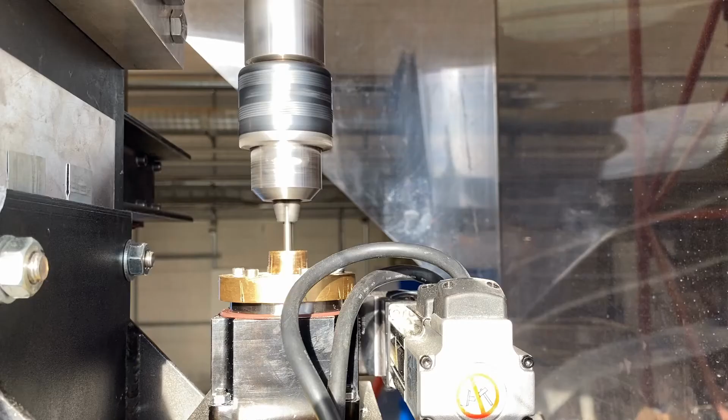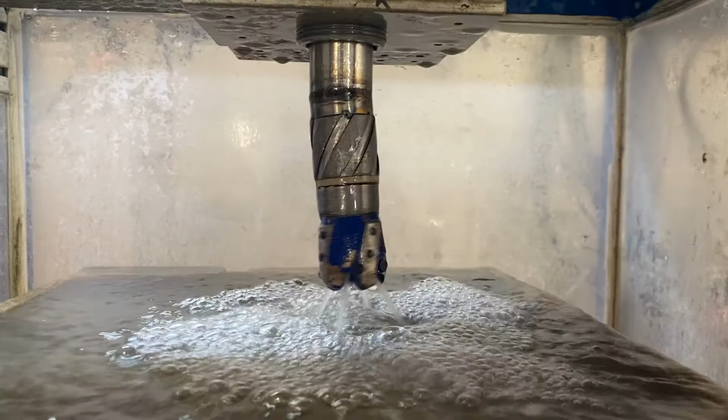The rig operates 3 motors. One motor is used to hoist the drilling component up and down on a ball screw, applying weight on bit. The next motor enables azimuth change. The last motor provides bit rotation by means of a long, thin rod.

The rod is connected in the top drive motor and in the BHA. It rotates inside the azimuth system, hydraulic swivel, and inside the drill pipe.

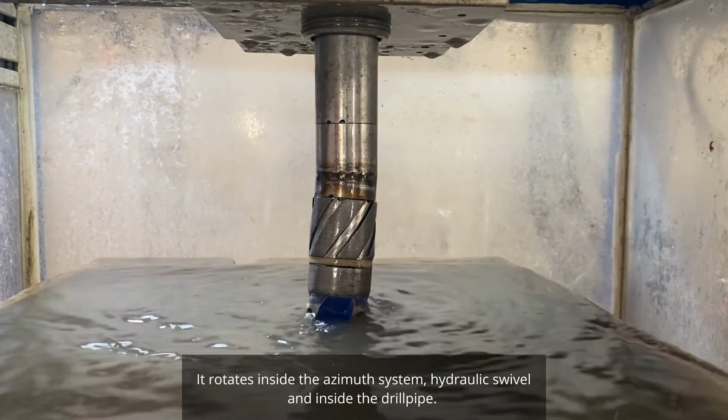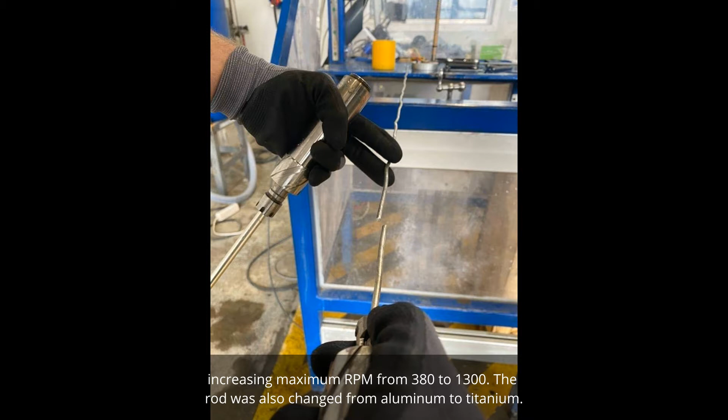The most challenging aspect was the rod twisting off while drilling. The solution was to change the top drive motor, increasing maximum RPM from 380 to 1300. The rod was also changed from aluminum to titanium. The lessons learned from this was that low RPM with high weight on bit generated torsion, which twisted the rod.

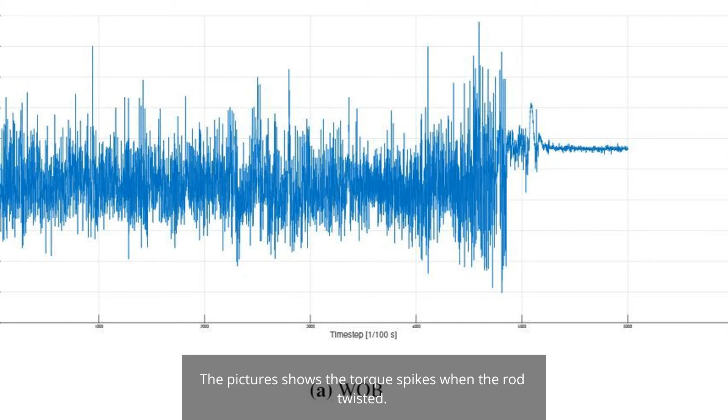The pictures show the torque spikes when the rod twisted. The team also learned that through trial and error, aluminum rod proved too weak. Steel, which allowed for less bending, was better, but still twisted. Finally, the team chose titanium, which was the best fit with respect to shear strength.

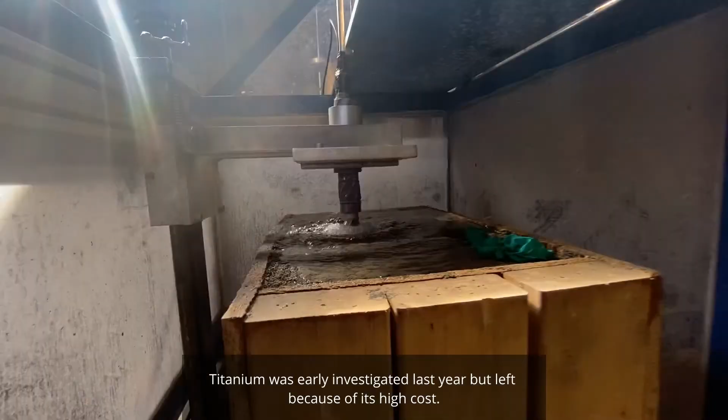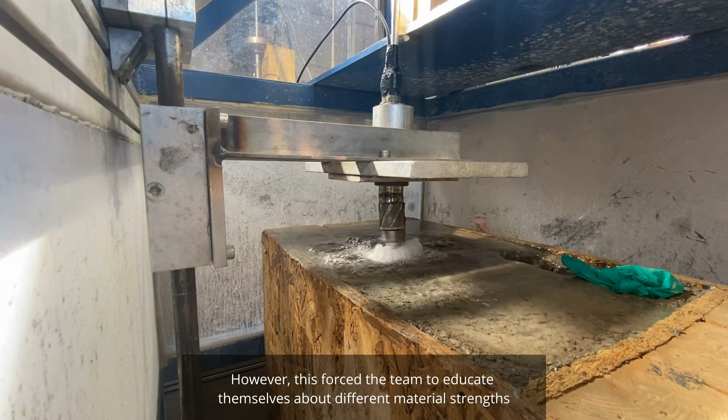Titanium was early investigated last year, but left because of its high cost. In retrospect, the team should have invested in the costly titanium rod. However, this forced the team to educate themselves about different material strengths and the forces present during drilling operations, such as rotational and axial forces.

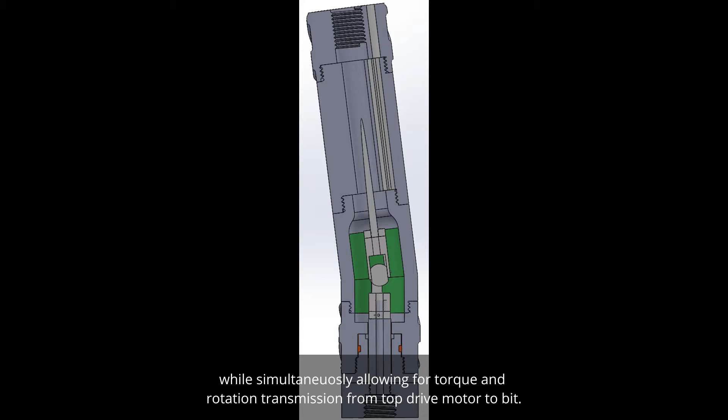The BHA is designed to build an appropriate angle with respect to the 30-degree inclination requirement. It is also designed to house and protect the downhole sensor card properly, while simultaneously allowing for torque and rotation transmission from top drive motor to bit.

As shown in the picture, the BHA is made up of 2 stabilizers: a sensor housing, a bend sub, a universal joint, a drive shaft, a packer, and a bit sub. The stabilizers stabilize the BHA in the borehole to reduce vibrations and offsets.

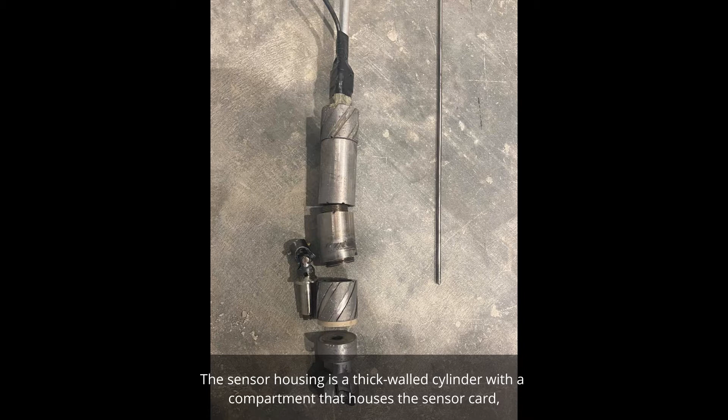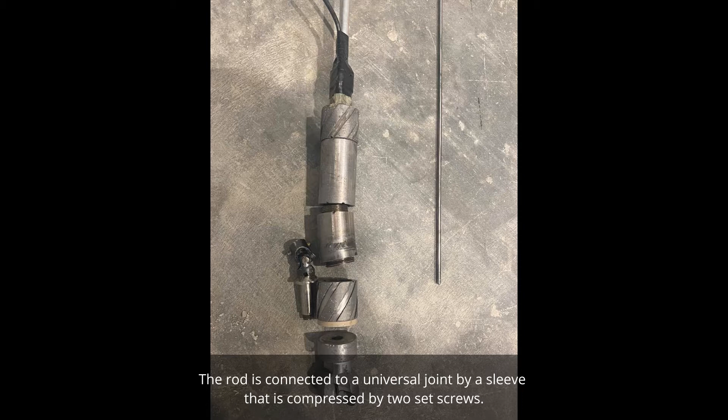The sensor housing is a thick-walled cylinder with a compartment that houses the sensor card, sealed off with liquid rubber and epoxy glue. The rod is connected to a universal joint by a sleeve that is compressed by 2 set screws. The universal joint is welded on the drive shaft that runs through the lower stabilizer and into the bit sub.

The packer located inside the near bit stabilizer is made of PEEK, allowing for concentric rotation of the bit sub and bit regardless of the packer and near bit stabilizer. It also has 2 toroidal seals to guide the water through the drive shaft.

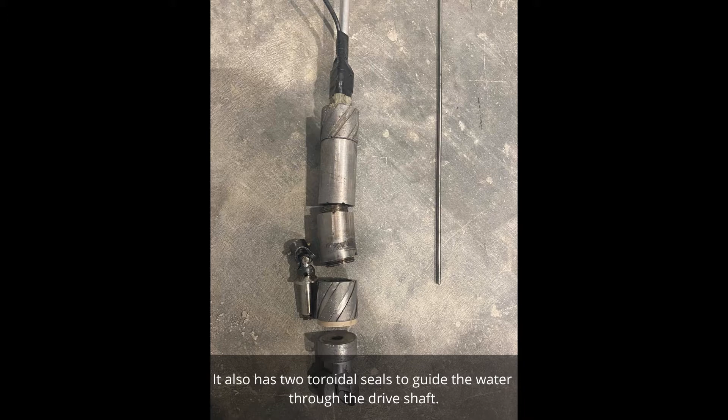Several changes have been made to the BHA after phase 1. The drive shaft have been increased in diameter to increase the strength. The universal joint was welded onto the drive shaft to further increase the strength in the connection point. To allow for the sleeve to get a better grip, the rod was filed down to achieve 2 flat sides. The bend sub angle has been increased to build more angle.

All these measures were done according to results from drilling tests to improve the design and prevent future fails and challenges. In case the sensor card fails, a backup solution is implemented and ready for use for easier sealing and protection, as shown in the picture.

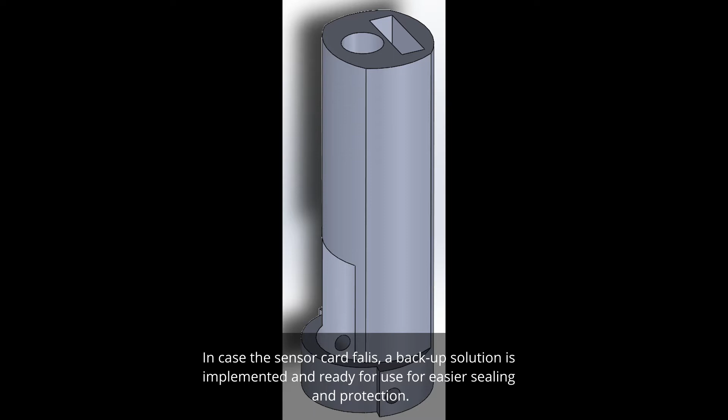The team have learned that the performance of small components in the BHA can have a major impact on the system in total. An important lesson learned is that changes in one part of the system may lead to challenges in another.

The team has 15 different bits available, where we have made 2 different bit designs, and Lyng Drilling, which is a Schlumberger company, have produced the 2 bits for us.

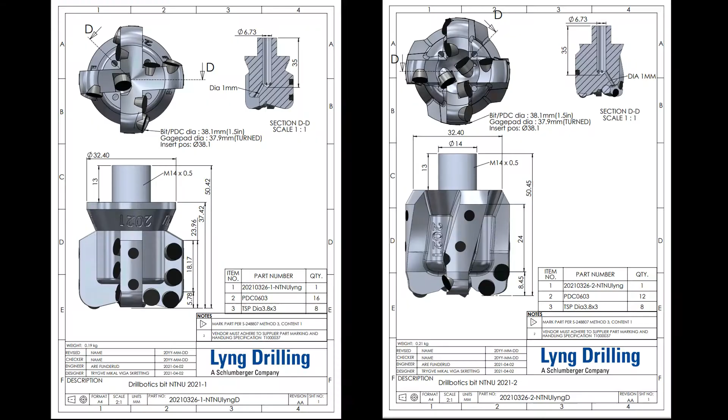When studying recent years' reports from NTNU and other universities, it was observed that the provided bit by DSATs experienced many problems with respect to instability leading to vibrations. The DSATs bit did not function well with a design involving a bend sub.

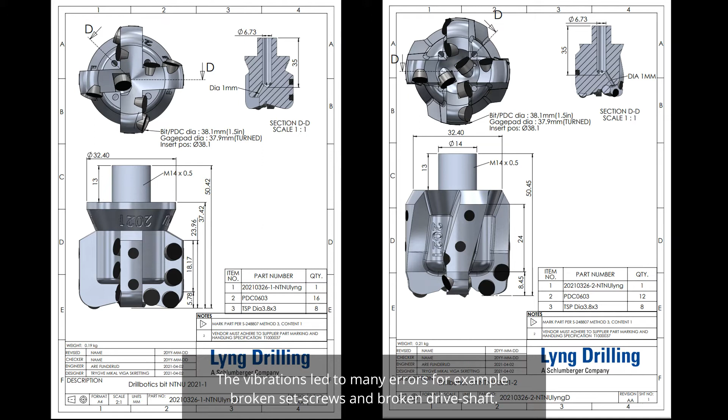The problems were also experienced for us when testing the DSATS bit. The vibrations led to many errors, for example broken set screws and broken drive shaft. It experienced problems with stability which led to extensive vibrations.

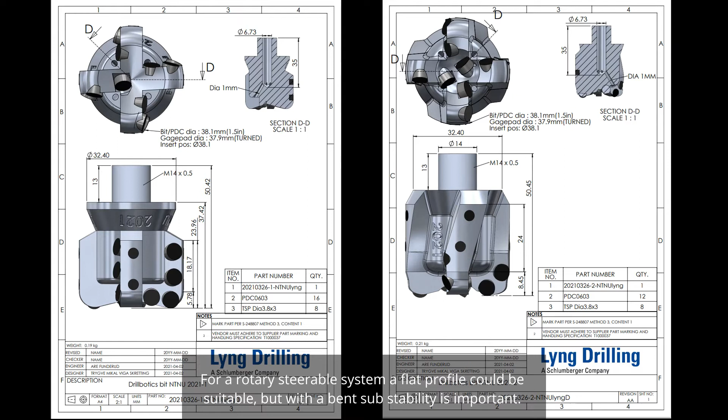This instability could be explained by the flat bit profile for the DSATS bit. A flat profile is not beneficial with respect to stability. For a rotary steerable system, a flat profile could be suitable, but with a bent sub, stability is more important. Because of this, the self-designed bit has a short parabolic profile with deeper cone angles than the DSATS bit.

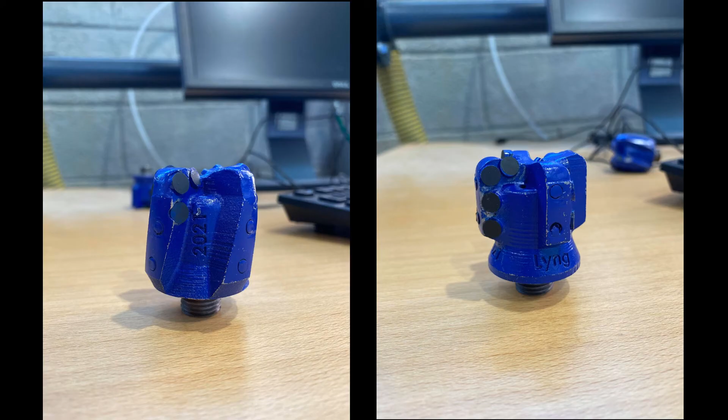We did also purchase different bits from Alibaba that performed well. The bits provided by Lyng Drilling were further improving the drilling performance. In addition to deeper cone angles, the bits have more cutters that leads to less rock volume to cut per cutter and a longer gauge length that helps with stabilizing.

The average ROP measured in centimeters per minute was improved from 0.5 to 1.5 centimeters per minute to between 3 to 7 centimeters per minute depending on the weight on bit. The bits did also minimize torque spikes and vibrations by a lot compared to the Alibaba and DSATS bit. This is very positive for the rod and connections in the BHA.

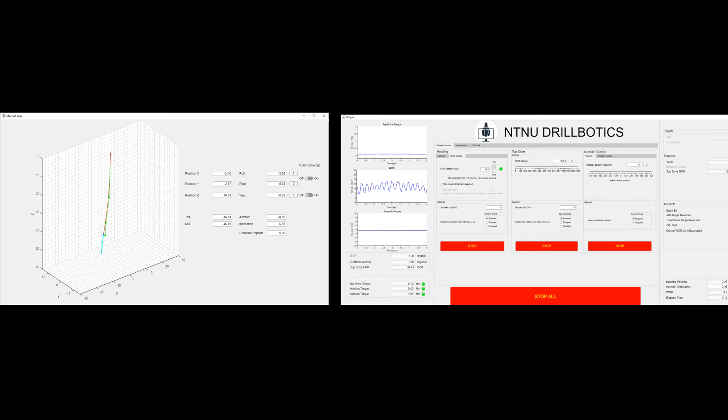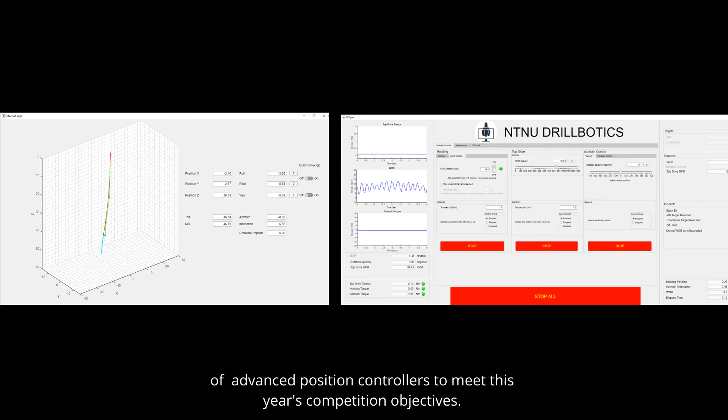We have a sophisticated control system developed in MATLAB and Simulink. The control system has been completely redesigned to allow simulations and fast-paced prototyping of advanced position controllers to meet this year's competition objectives. The downhole sensor is a modified Arduino microcontroller used to estimate the orientation of the BHA.

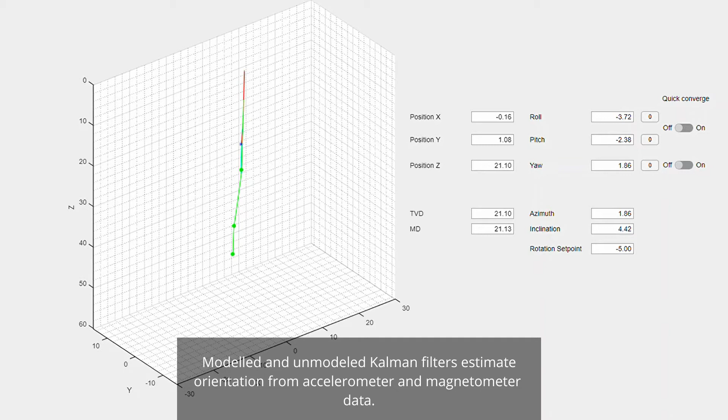Modeled and unmodeled Kalman filters estimate orientation from accelerometer and magnetometer data. It was discovered that vibration patterns while drilling made real-time estimation of orientation difficult. Automatic orientation surveys are therefore executed at regular intervals. Between each survey, the position estimate relies on model predictions.

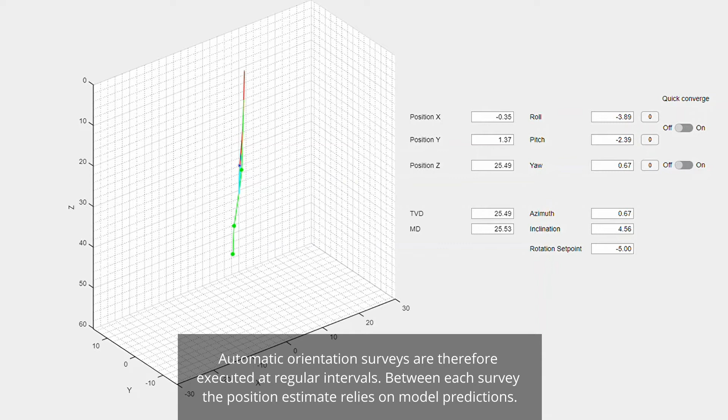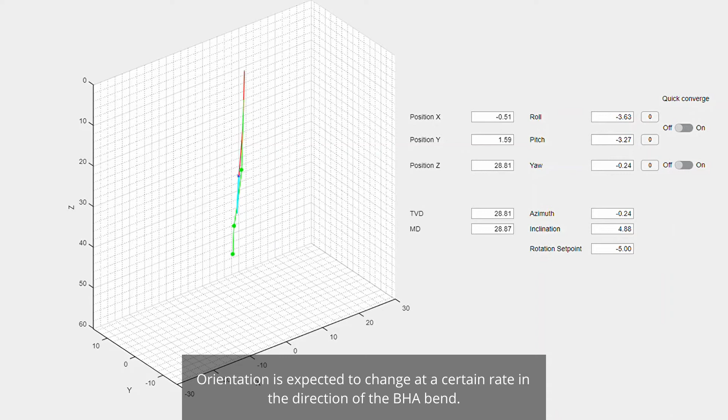The positional model assumes that the BHA will move in the direction of its current orientation at the movement velocity of the hoisting system. Orientation is expected to change at a certain rate in the direction of the BHA bend. The azimuth control steers by orientating the BHA bend while drilling to follow a Bézier well path reference.

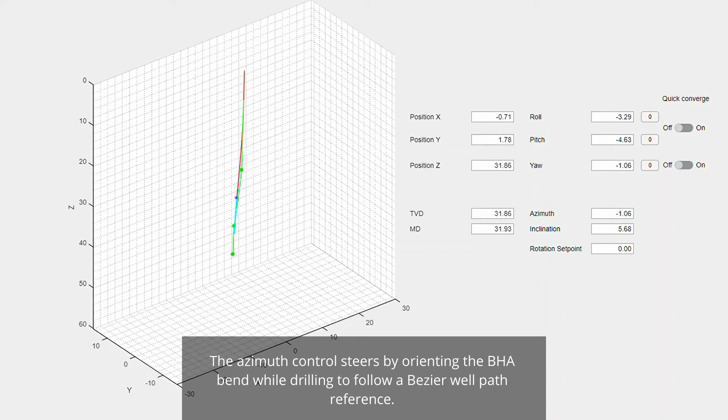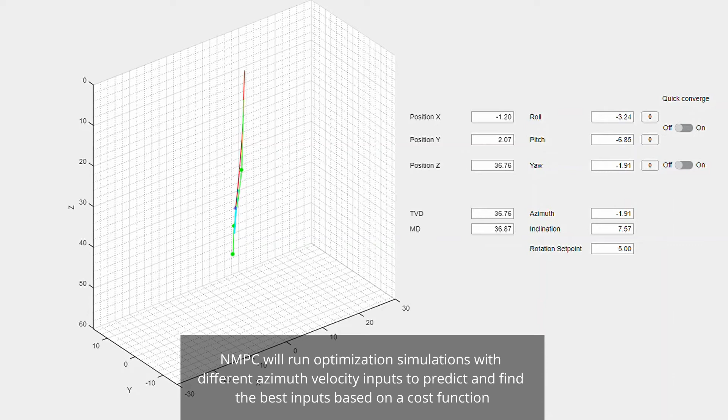A nonlinear model predictive controller, or NMPC for short, is used. NMPC will run optimization simulations with different azimuth velocity inputs to predict and find the best inputs based on a cost function before applying the first optimized input to the system.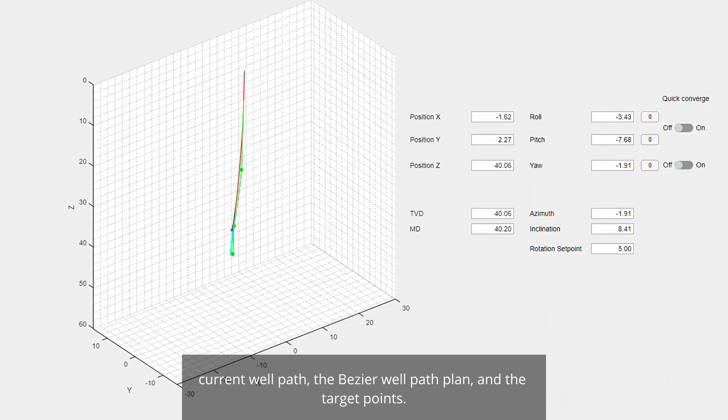A future well path prediction is shown in real time and displayed in a 3D plot together with the current position, current well path, the Bézier well path plan, and the target points.

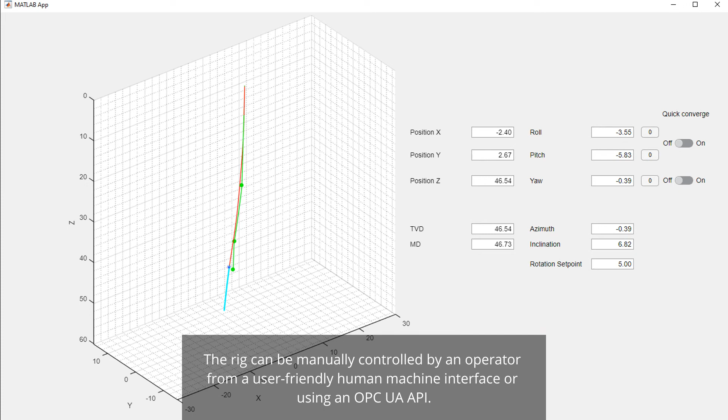The rig can be manually controlled by an operator from a user-friendly human-machine interface or using an OPC UA API. Relevant data is displayed to the operator in real time.

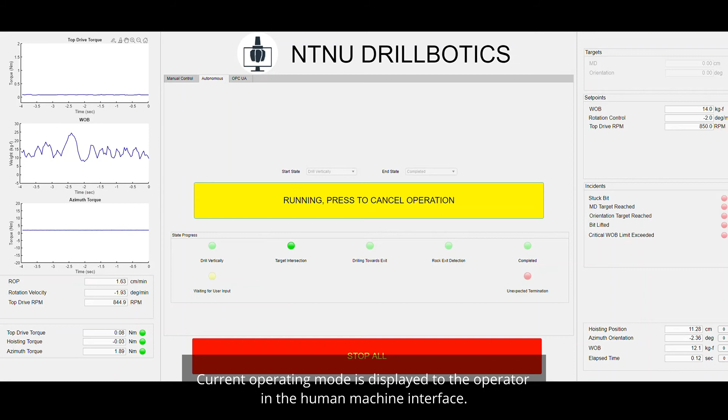The autonomous system is based on a state machine. Current operating mode is displayed to the operator in the human-machine interface. High computational cost requires the control system to be run as a distributed system on 2 different computers.

Incident detection and additional safety features are implemented. Most notably, a stuck bit incident detection system will automatically lower weight on bit if the bit gets stuck within a few tenths of a second. Stuck bit is detected from a spike in top drive torque.

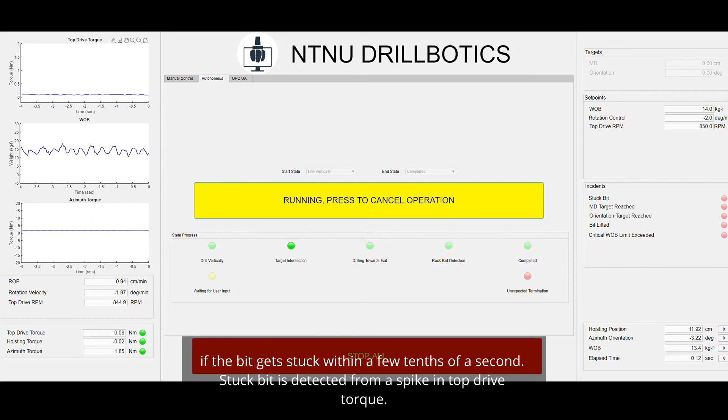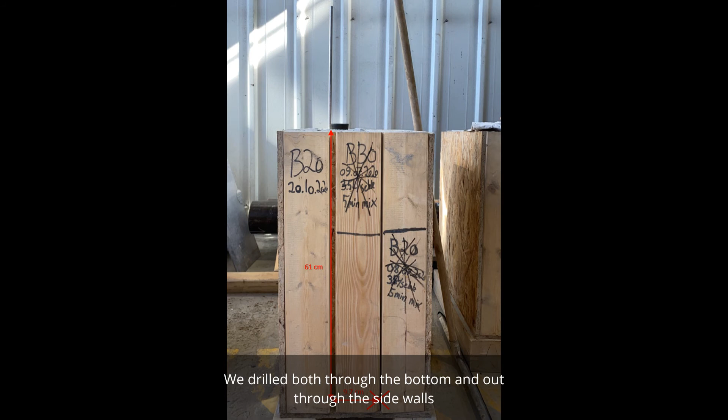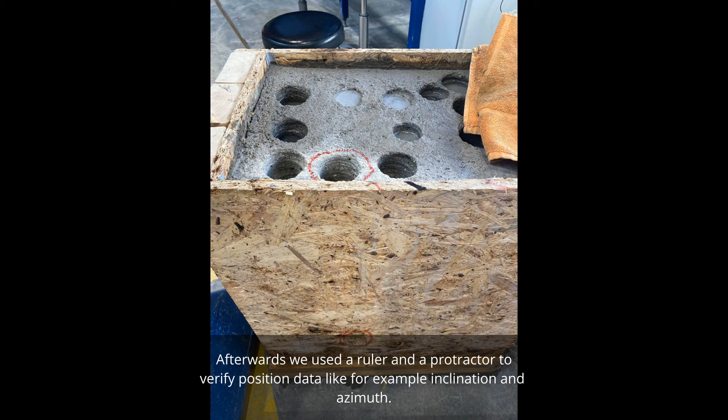To verify if the received sensor data were accurate, runs where we drilled out of the rock were done. We drilled both through the bottom and out through the sidewalls. Afterwards, we used a ruler and a protractor to verify position data, like for example inclination and azimuth. The results were very positive and confirmed that the sensor card was satisfactorily accurate enough.

The NTNU Drillbotics team is granted a sponsorship of 25,000 Norwegian kroners from Equinor. The rest of the budget is covered by BRU21, which is NTNU's research and innovation program in digital automation solutions for the oil and gas industry.

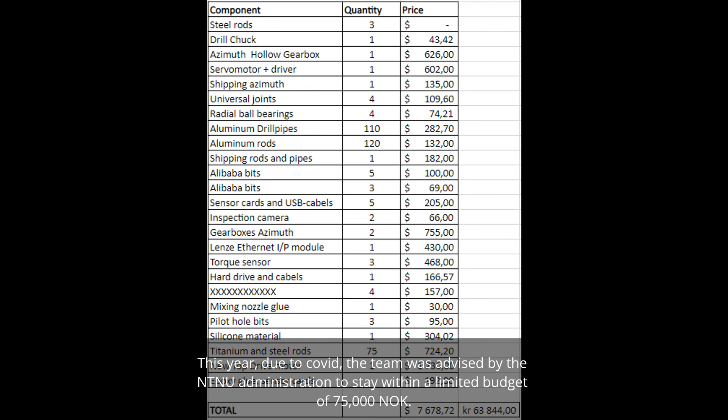This year, due to COVID, the team was advised by the NTNU administration to stay within a limited budget of 75,000 Norwegian kroners. By looking at the budget presented here, we managed to stay well within the budget, as our total expenses ended up at approximately 64,000 Norwegian kroners, equal to approximately $7,600 US.

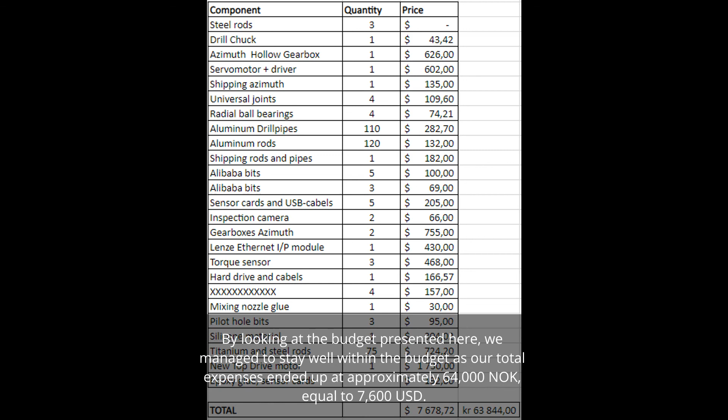Important lessons learned with respect to the budget is that it is important to leave room for a buffer in case of unforeseen incidents and expenses. Good planning results in great results even when your budget is tight.

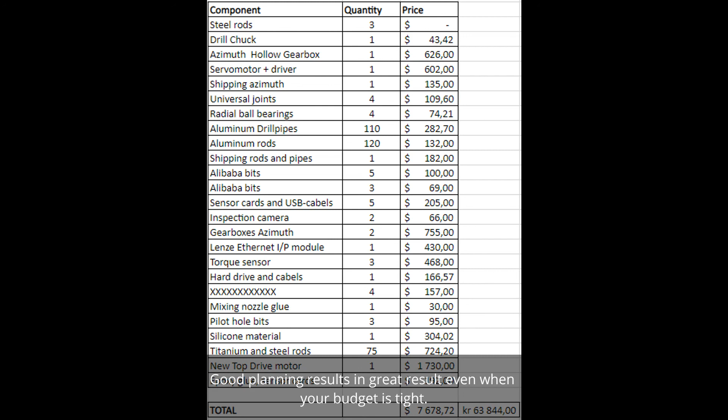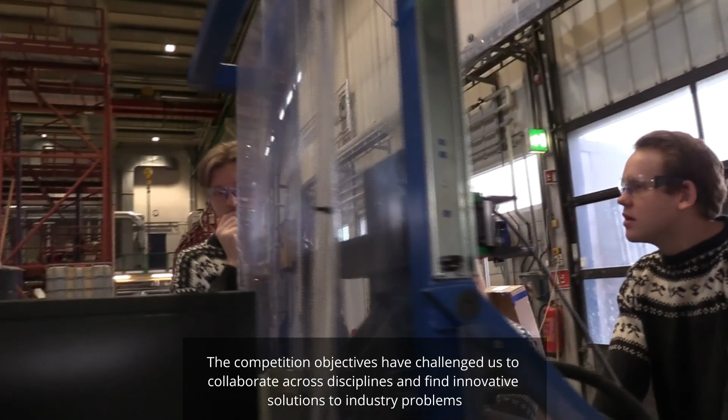This is our contribution to the 2020-2021 Drillbotics competition. The competition objectives have challenged us to collaborate across disciplines and find innovative solutions to industry problems. We are confident that the project has prepared us for our future careers, and we are proud of what we have accomplished.